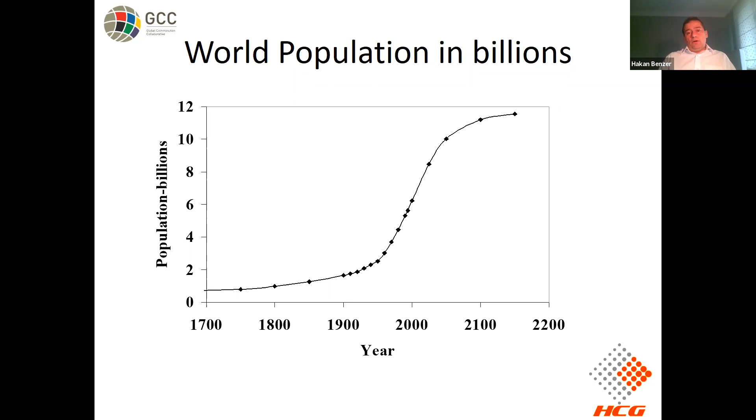If we follow the energy consumption of the world, according to the International Energy Outlook reference, we can see that especially in certain regions, the energy consumption doubled or tripled. So we can say that the total energy consumption is continuously increasing, and basically the major role goes to the comminution side. As we all know, 5% of total electrical energy consumption is used in comminution worldwide, statistically, and the cement industry takes the majority of this consumption.

It's roughly speaking 2%. In a typical cement plant, 60 to 70% of electrical energy used goes to comminution. For those who are not familiar with the cement industry, let me explain where the comminution takes place. There are 3 steps where we implement comminution. One is, of course, fuel grinding. The other one is raw meal grinding. And the third one is the final cement grinding.

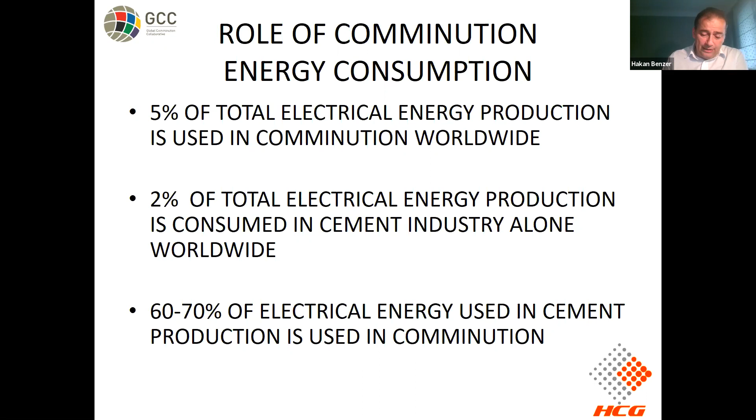In addition to all of these, in order to increase the surfaces, we may grind some pozzolan materials, such as blast furnace slag or some natural pozzolans, to finer values. So comminution is very important, and cost-wise, it's very critical in the cement industry. And with the competition, especially when cost issues are getting important, the cement industry changed its mind from conventional technology to innovative technologies.

In parallel to all of these, especially in recent years, we are all aware of the Kyoto Protocol on climate change, and the countries who signed up accepted to come back down to the 1990 levels of carbon dioxide emissions of 20 or 30 years ago.

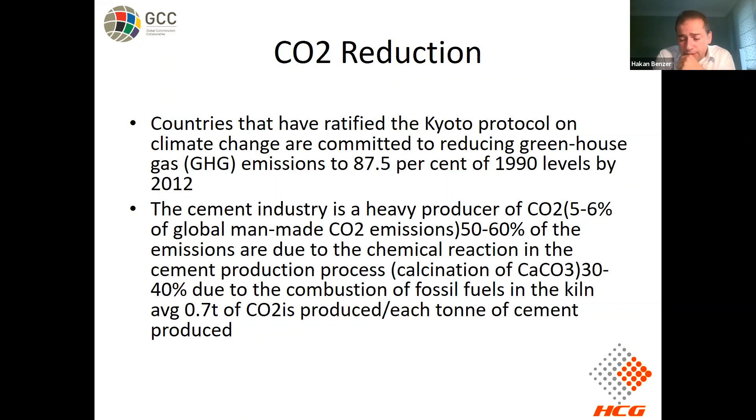When we look at the cement industry, it's a heavy producer of carbon dioxide, and roughly speaking, 5 to 6% of global man-made carbon dioxide emissions come from the cement industry, basically depending on the chemical reaction there. So in order to produce 1 ton of cement, they produce 0.7 tons of carbon dioxide in their factories.

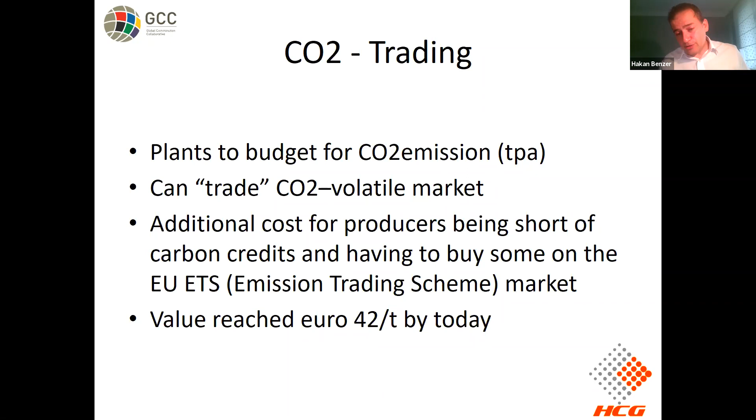Therefore, carbon dioxide trading is very important for them, because nowadays, roughly speaking, a cement plant's profit is in the range of $10 to $12. So plants have started to budget carbon dioxide emissions because there is a trade and a volatile market. And if you want to buy carbon dioxide on that market, today it reached up to 42 euros. So it's well over your profit. That's why they have to be very cautious in terms of energy consumption. And this is where they start to think innovatively.

This is a typical conventional dry grinding circuit of cement production. It's a 2-compartment ball mill running with a classifier. You come down to a certain grind size. Nowadays, it's very fine. A typical number for cement produced nowadays is a D50 value around 12 microns. It's very fine production with a very old technology. And a typical energy consumption would be between 30 to 40 kilowatt hours per ton for that fineness.

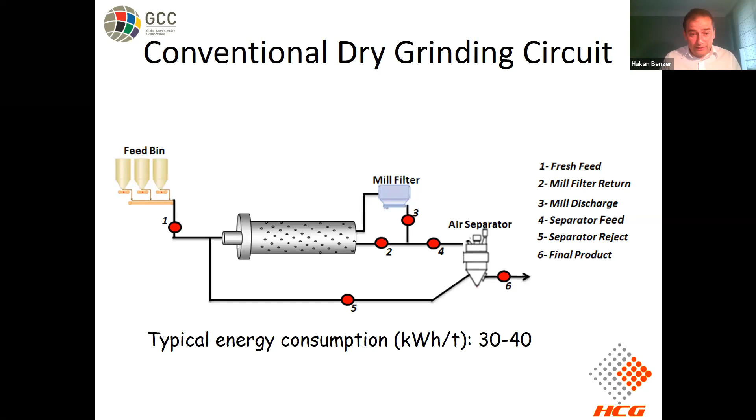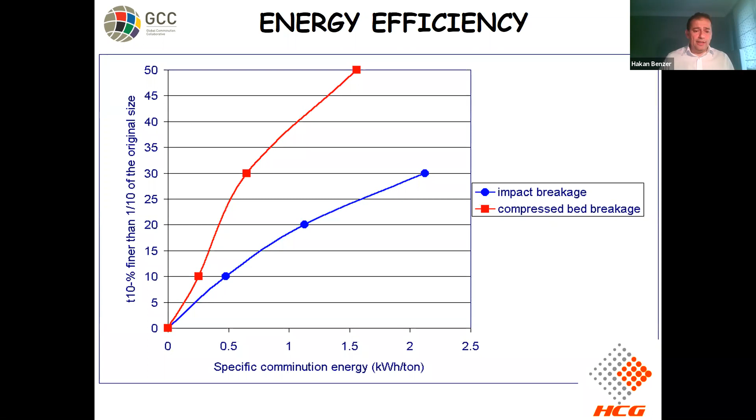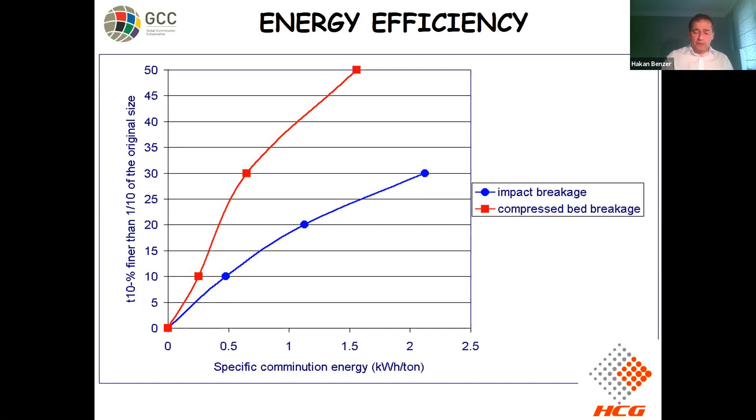After thinking innovatively, of course, we all know that compressed bed breakage has more efficiency compared to impact breakage, and it's proven. If we check the diagram here, at a certain specific comminution energy, we can produce more fines under compressed bed breakage conditions. And this has been patented and worked on with German scientists, and then a commercialized unit started in the cement industry.

Of course, it was not enough. And then a combined version of the high compression system, which is the vertical roller mills. The high compression system is underneath, and on top of it, there's an embedded air classifier working as a unit, producing its final cement right now, but it started with limestone, and for many years it has been used for limestone and the coal industry. Recently it's been in operation for cement grinding as well, with reduced energy consumption to roughly the same level as the HPGRs.

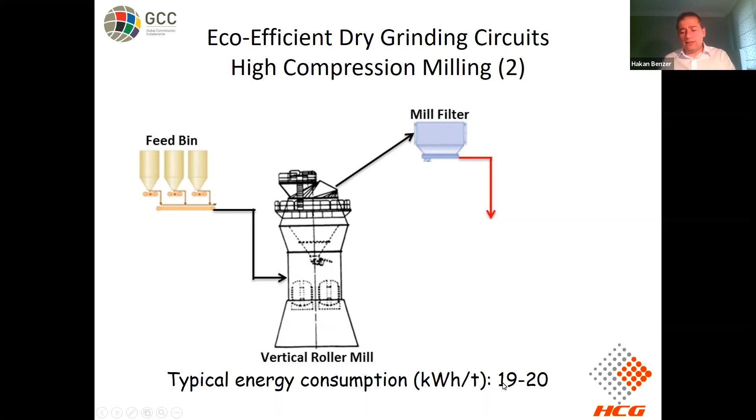Where did we stay in this action as the Hacettepe Comminution Group? When we started the group, we had two hats on our heads, because we come from the mining department, and we have the advantage of closely working with the cement industry, since the number of cement plants in the country is around 80. So in every 50 kilometers we have a laboratory plant we can easily reach and do whatever we needed to do.

So we started a program in 1997 called Modeling and Simulation of Dry Grinding and Classification Circuits, with our mining engineering understanding, because the cement industry's understanding of comminution is totally different. They were thinking about it as a black box. For that reason, we needed to understand the performance of the equipment used in dry grinding. So we started working on the ball mills, the roller presses, HPGRs, vertical roller mills, horomills, and the air classifiers.

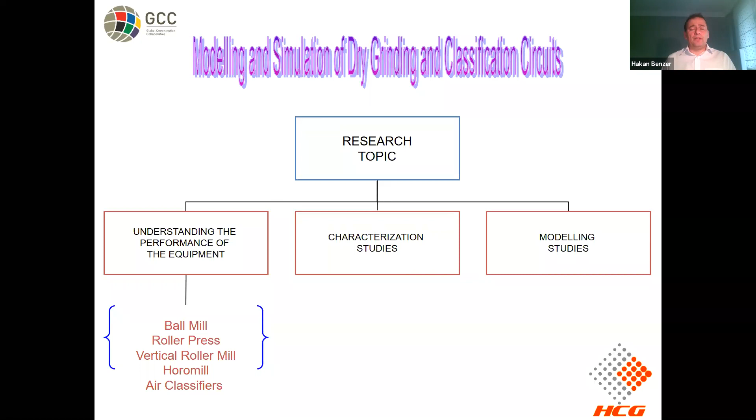These are the innovative technologies, or high compression technologies, being implemented in the cement industry. Since 1985, this has been heavily used in this industry to reduce energy consumption and take advantage of the high compression system. And we started working on this.

In the meantime, we started evaluating the situation of the mining industry. The mining industry has got some challenges ahead, because as we all know, the grades are decreasing and the rock hardnesses are increasing. Again, the carbon footprint is an issue for the mining industry, and the grind size is decreasing, of course, because of liberation requirements. Energy shortage is approaching, and the water issue.

We celebrated Water Day, I think 2 days ago. It's becoming more and more significant because mineral processing requires larger volumes of fresh water, and also mineral tailings is becoming a problem, and dry stacking is taking its place. For instance, in Australia, the mining industry accounts for 2% of the nation's total water use. So it is significant. Typically, industry needs 500 liters for every ton of ground ore. This means we have to start thinking about dry comminution and then dry processing step by step, because after the carbon footprint, water use will be very expensive for the mining industry as well.

If we look at the problem from the energy distribution side, we all know that comminution represents a minimum of 10% of the site production cost, because 54% goes to crushing and grinding. And roughly speaking, it consumes up to 3% of all electrical power generated in the world.

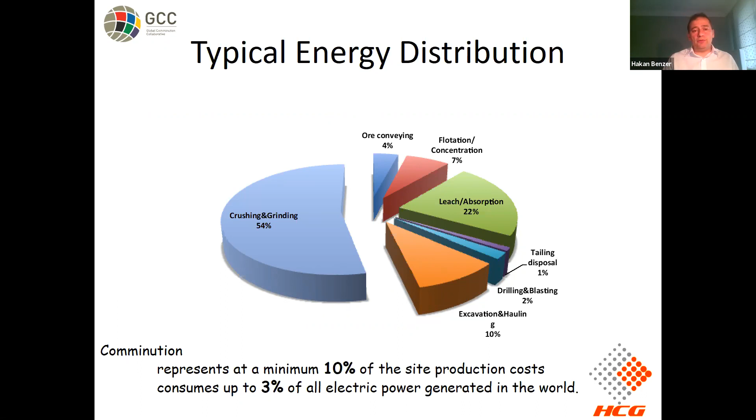We all know that with the high pressure grinding technology, or with the roller presses, the mining industry started their application. If we look at the high pressure grinding rolls, which was introduced in 1985 for the first time, of course it was started with the cement industry, and it was built especially for treating more abrasive materials.

When we look at the schematic view of the equipment, the HPGR consists of two counter-rotating rolls mounted in heavy-duty bearings here, and pressure is applied to one of the rolls while the other roll is fixed in a certain frame. The rolls are driven by separate motors, and the rolls can be operated either at a fixed speed or variable speed, depending on the process.

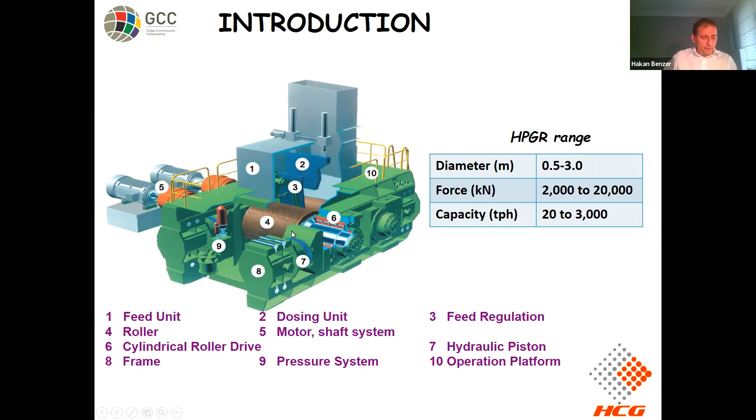Comminution in an HPGR takes place primarily through interparticle breakage, like you see here. Once the material is fed into the system, there is an acceleration point where the material is nipped, and it passes through the compression region. The direct contact of the rolls onto the surfaces transmits energy through the bed of particles in intimate contact with the surrounding particles. The breakage generally occurs, or preferentially occurs, along the grain boundaries, which we call from time to time microcracking.

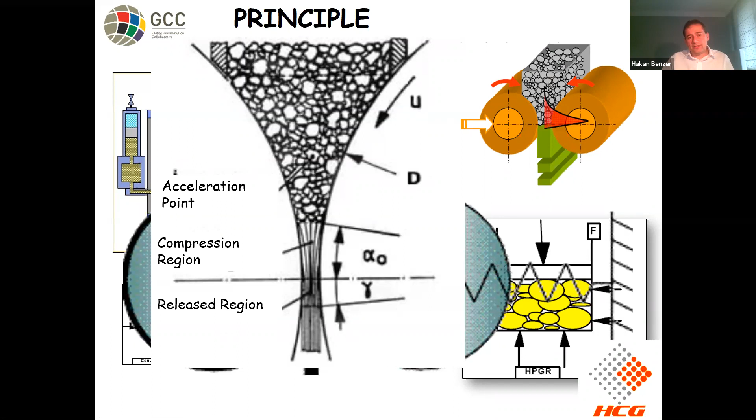And the HPGR product is in the form of a cake if it is operating under a high compression regime, because in most mining applications, unfortunately, we couldn't observe this cake formation because of less power use or less specific grinding force.

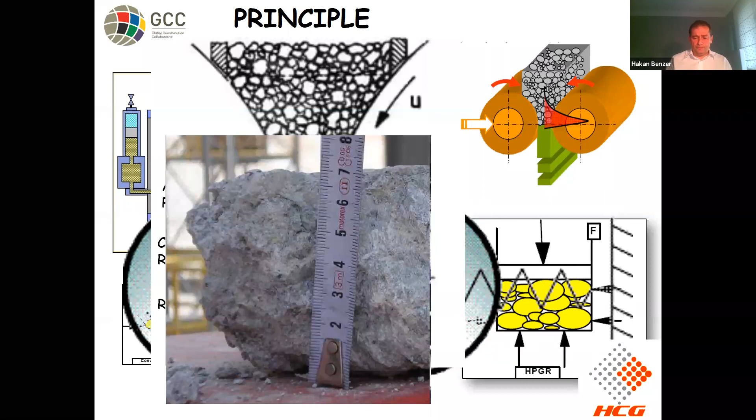What about the benefits apart from the energy utilization of high pressure grinding rolls in the system? The high pressure grinding rolls, vertical roller mills, or compressed bed breakage systems first of all produce more fine material compared to a typical crush size.

All these data have been measured by ourselves. For instance, in the gold industry, we made that comparison and observed a significant increase in the HPGR product. Roughly speaking, if you are effectively using your HPGR in a hard rock application, we can expect 40 to 45% of minus 1 millimeter material in the HPGR product. This is typical.

We also observed or measured microfractures in the HPGR products under the microscope, but also in some cases, especially within the cement industry, we measured this through the work index change of the ball mill feed. It dramatically reduces the ball work index because of the fractures created in the ore body, if of course the high compression can be implemented onto the material.

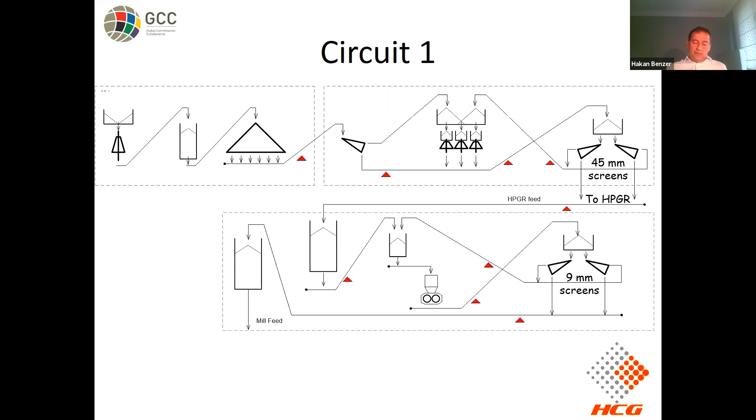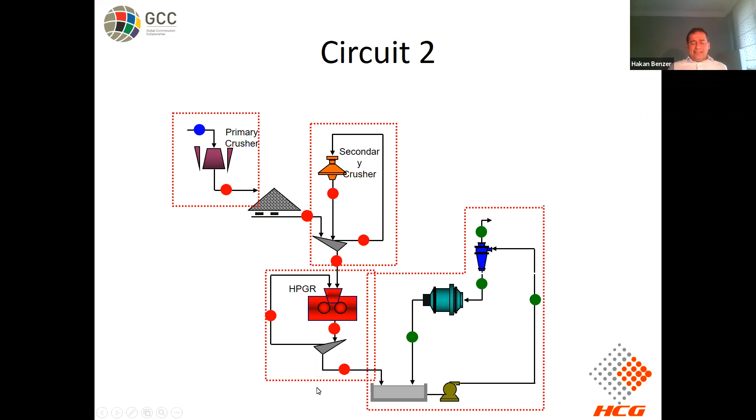So generally speaking, in most of the circuits, we are using the HPGRs as a tertiary crusher stage or very expensive cone crushing application, feeding the ball mill. If you implement a high compression zone, you may reduce the bond work index, which might be utilized as energy efficiency in the downstream ball milling operation, or the fines generated can be evaluated as a production increase. This is the only simple advantage that we could be able to get in the mining industry.

And the third circuit is more on pebble crushing. After the SAG milling operation, if we have pebbles coming out of the system, we can utilize, or we are utilizing, the HPGRs to crush these pebbles.

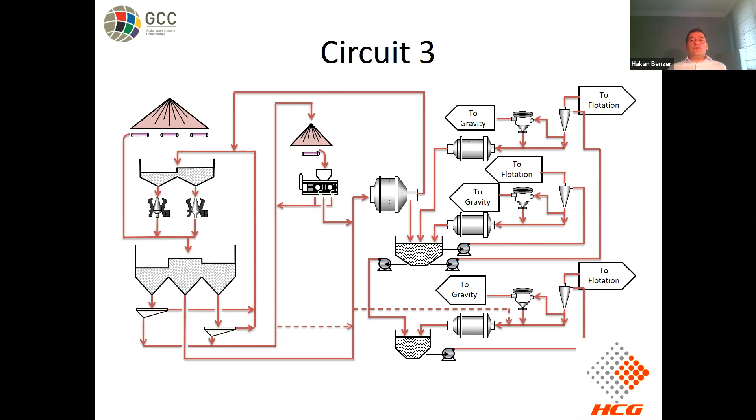So what can we expect from an HPGR if we look at the story from the cement industry back again? You will see 5 different types of application or circuit type in the cement industry. Chronologically, in 1985 when it started, the HPGRs automatically started running in open circuit mode, so it was used specifically for feed preparation to the ball milling operation.

Afterwards, the operators noticed that because of the requirement of adjusting the feed going into the roller press, they split some of their products back onto the HPGR in order to increase the confined bed conditions. So they needed some fine materials. This brought the idea of the hybrid operation, because the HPGR is running with a ball mill, and the ball mill is running with a dry classifier. Some portion of the very fine material can be sent back to the HPGR to increase the compressed bed conditions.

Afterwards, the industry realized that the HPGRs produce significantly fine material, and if an appropriate classifier can be used, then the production rate or the advantage can be maximized. This is the closed circuit application of the HPGR, running again with a ball mill circuit.

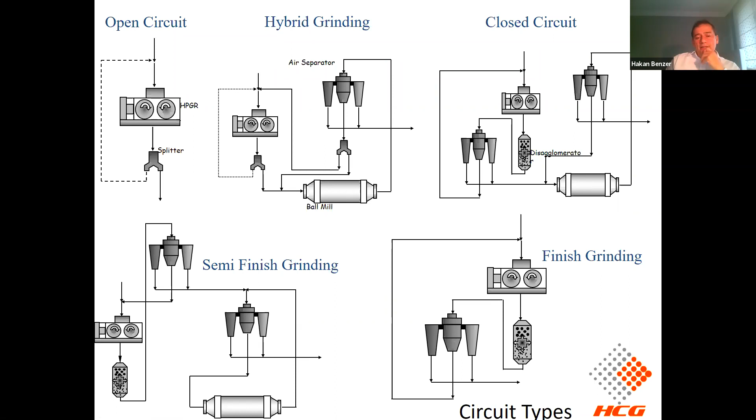Why are circuit types important? Let me explain with some data we collected from a closed circuit application. Here, the feed going into the system is 18.5 millimeter F80 size, and it comes down to 60 microns just in an HPGR circuit. We are talking about a reduction ratio of roughly 300 at 8 kilowatt hours per ton, including the fans, the classifier, and the main motor.

So significant work is being done with the high pressure grinding roll system, and this is typically fine. Of course, in this case, it was not sufficient for the final cement to produce the required strength.

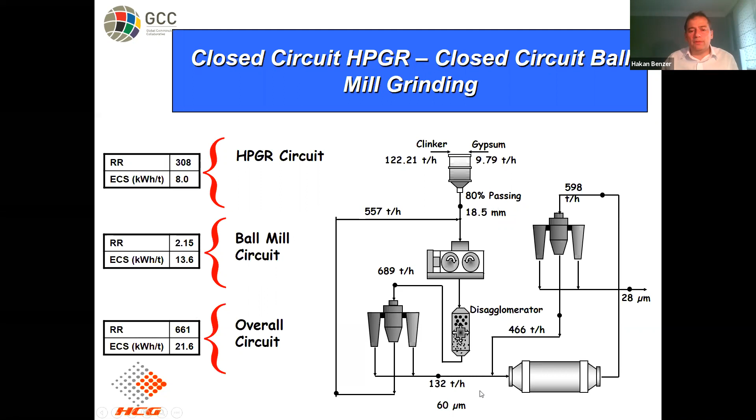Again, at the ball mill, the air classifier is used to grind from 60 microns down to 28 microns. To achieve this reduction, we are spending 13.6 kilowatt hours per ton. So in total, it is 22 kilowatt hours per ton from a starting point of roughly 20 millimeters down to 28 microns. But the majority of the work is being done with the high compression systems here.

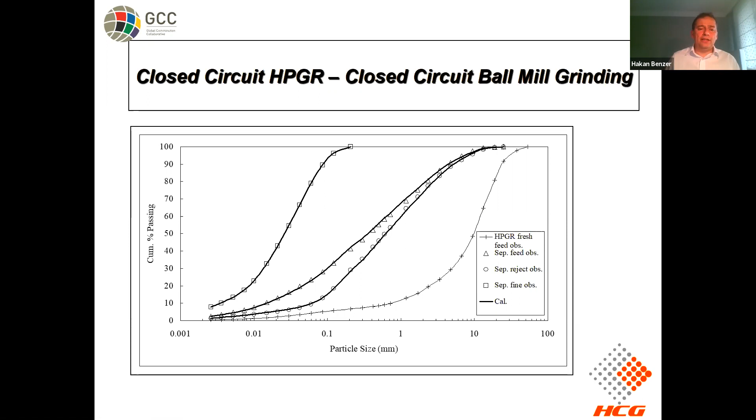You can see the full size distribution around the system. This is the typical HPGR product from a closed circuit. You may notice that we are receiving a steeper size distribution. The reason is the immediate action of fines generation being pulled out by the air classifier from the system, and this gives an energy advantage to the equipment.

What about the air classification? This is a typical performance curve of an air classifier, and you can see it's in the range of 20 to 25% bypass value, which looks like a hydrocyclone operation.

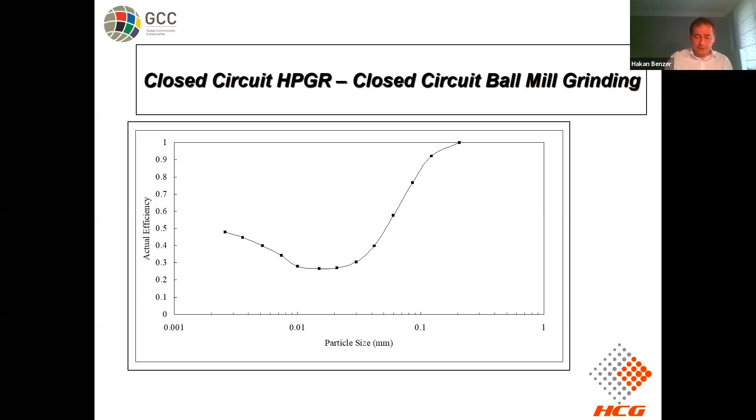Can it be more effective? Yes, it can be. But in terms of energy consumption, if we think of the open circuit HPGR as spending 100% specific energy consumption, this can be reduced to roughly 50-55% just by changing the circuit type. So the HPGR route goes from open circuit to closed circuit.

How will we achieve this? We need classification, dry classification, or in other words, air separators. The first air classifier was patented in 1885 in response to the need to grind large volumes of material.

In technological development, three types of air separators emerged. One is the static version, the other is the dynamic version, and the most recent is the combination of the static and dynamic versions.

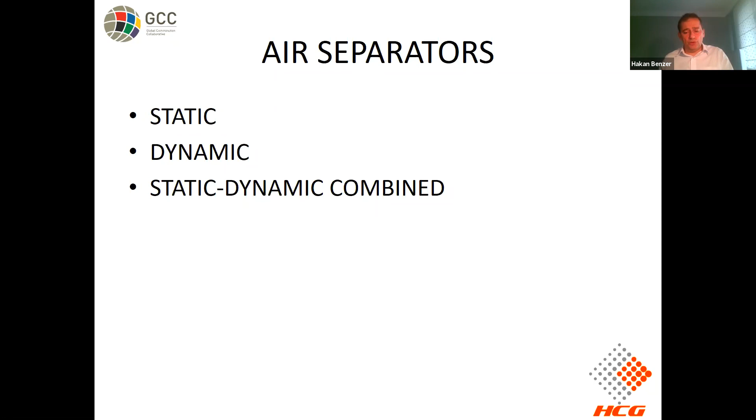The forces acting on air classification can be split into four. As we expect, the gravitational force is very dominant. There's a drag force implemented by air velocity, a centrifugal force created by the dynamic part or the rotor cage, and the impact force which prevents the material from staying in the classification zone.

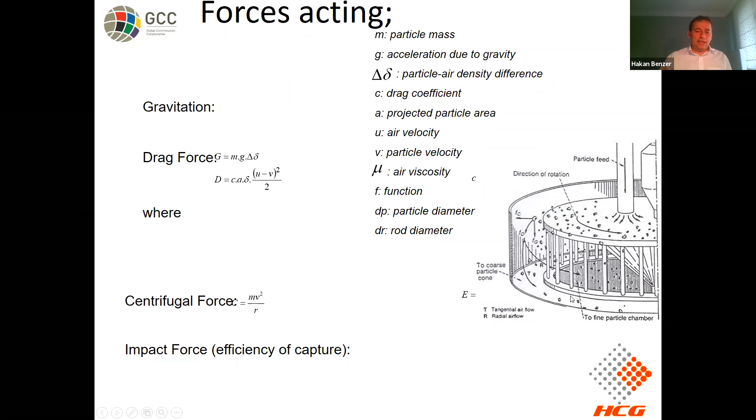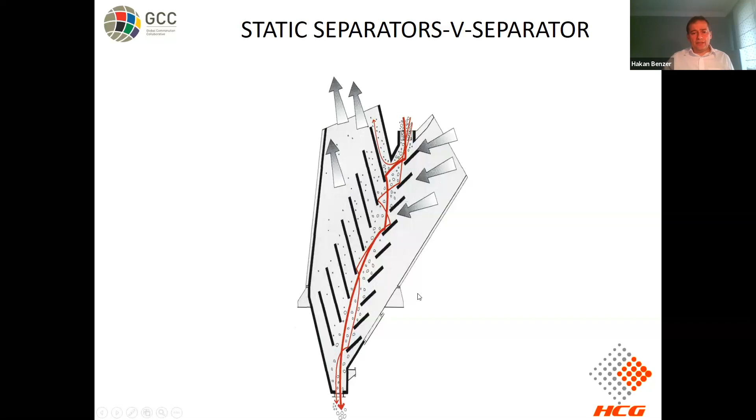In a typical cement application, we can expect to receive a P80 value of 200 microns from the fine section of a V classifier, which is running with an HPGR.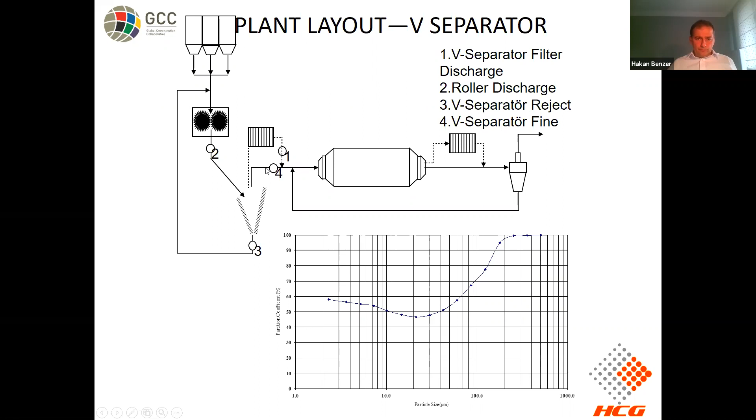The other version is the dynamic classifiers or dynamic separators, where the material is first dispersed on the distribution table and falls down into the gap between the cage and the guide vanes, forming a thin curtain of material here.

After passing through the vanes, the air moves into a horizontal vortex, and the air carries the fine material tangentially across the face of the rotor, which is turning in the same direction as the vortex. So the separation can be controlled by varying the volume of the air flowing through the separator: as you increase the volume, the product becomes coarser.

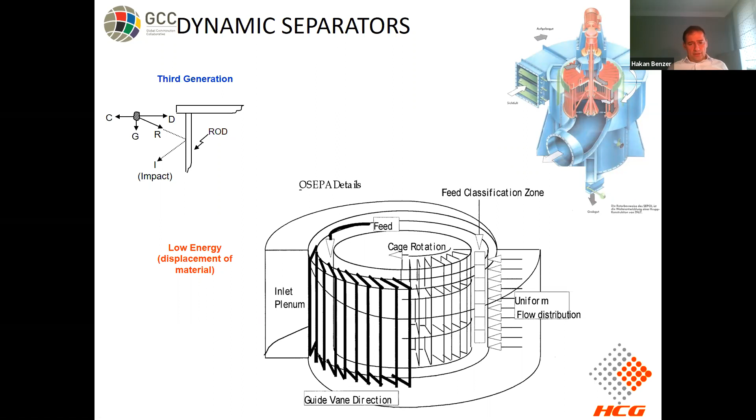By changing the speed of the cage, or by increasing the centrifugal force, the fineness can be increased. Also, the other static controlling point is the guide vanes, which comes from the design. But in the control room, with a simple adjustment of the airflow and the rotation of the cage, you can easily adjust the production or the size.

Chronologically, the development of the dynamic separators started from the first generation to second, and recently the high efficiency separators are in operation in many applications. As you can see here, the air use in the classifier is quite critical, and with the high efficiency separation system, we can reduce the bypass to below 10%, and we can achieve very steep or very efficient separation if the classifier is suitably designed according to your material.

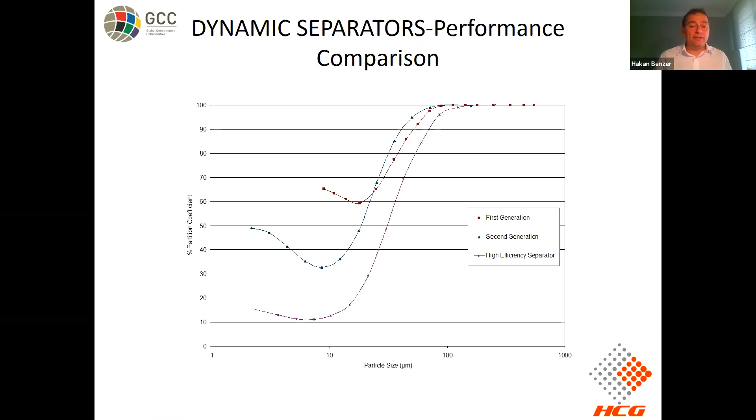The importance of using this V type of classifier is you can implement hot gas or fresh air to dry your material as well. This is a very typical application, especially with high moisture content cement material, especially limestone and clay. The hot gas can be used to dry the material. This can be a solution for high moisture content hard rock applications.

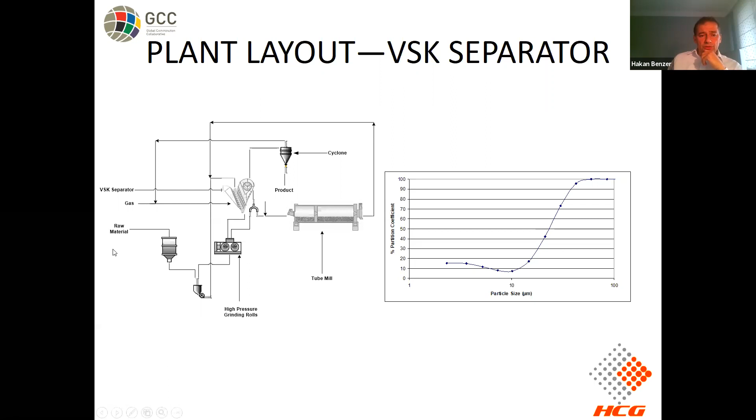What about the vertical roller mills? We talked about the high pressure grinding rolls, which can be utilized to produce final cement with a suitable classifier. Vertical roller milling is the ancient technology of this technique. On the left-hand side, you can see a 1 horsepower mill, which was used for grinding food. And this is the recent version, maybe over 1,000 horsepower, used for grinding either minerals, cement, coal, or limestone.

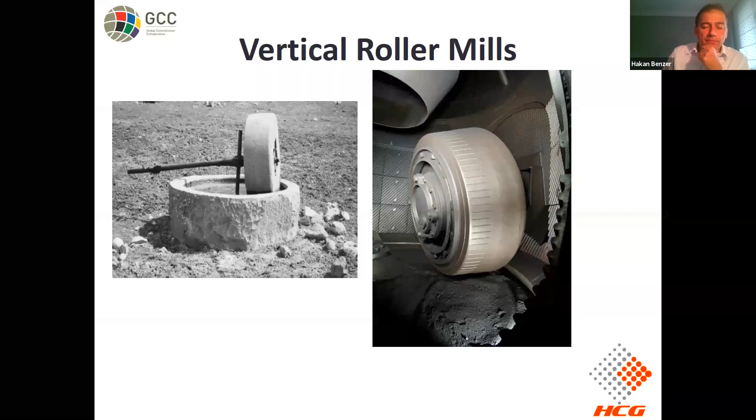So human beings have known this technology since the Middle Ages, going from muscle power to the very strong motor power which we implemented in the vertical roller milling technology.

So if you look at the vertical roller mill working principle, we have a grinding table here, and we have the rolls, which apply pressure, and with the rotational speed of the grinding table, the feed material coming onto that table is directed underneath the high compression zone, and the air flow pneumatically carries the material to the air classifier sitting on top of the system, which is used for fine classification. The fine material comes out from the system as a final product, and the coarse material is sent directly back to the grinding zone here.

It's a unique machine. It's 1 unit. Everything is included: the grinding action and the classification are in 1 unit. It is running as a black box. You can only see the fresh feed coming into the system. You can follow the fine product coming out from the system. The internal action was a question mark.

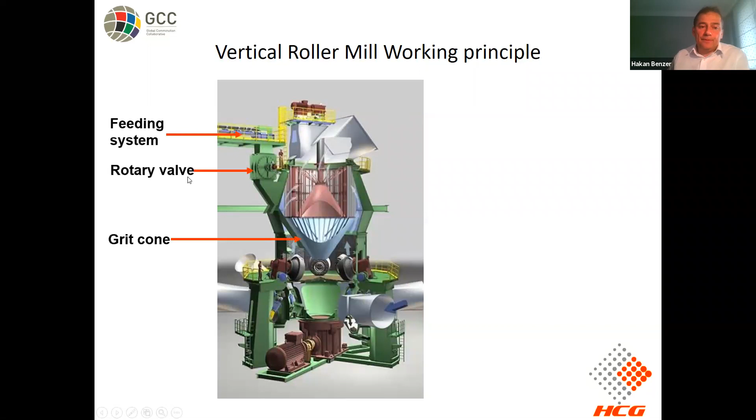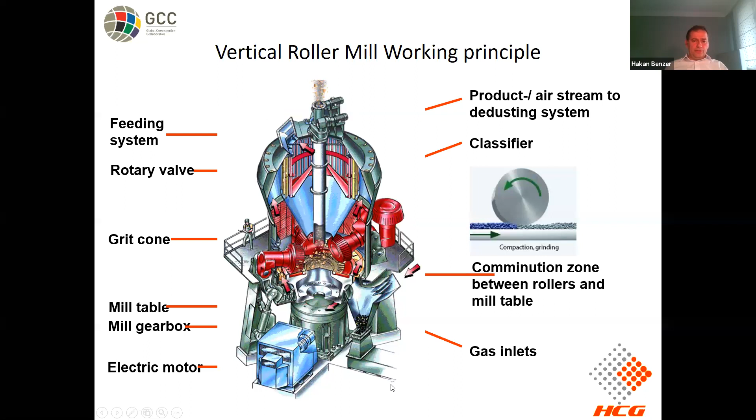You see the feeding system, the rotary valve. This is the comminution zone where the compaction and grinding occur. The mill table, the gearbox and the electric motor are the main parts of the equipment. Of course, the classifier and the gas inlets are used for the separation in the system. You can see the schematic view of the operation. The feed comes into the system, and the fine product comes out from the system. All the grinding action takes place at that point.

What about the benefits of vertical roller mills, energy-wise or maybe metallurgical-wise? There has been lots of work done on this, especially on the cement side. 30% energy saving can be provided by direct VRM grinding. This is proven. That's why the industry, or the new greenfield projects, immediately go for vertical roller mill application in cement grinding as well.

We had a chance to work with the OGP plant of the Loesche company for more than 6 months in Turkey. We had the chance to evaluate different ore bodies, different mineralogies, and we observed that at least 18% less grinding energy consumption can be achieved compared to a conventional wet ball milling circuit.

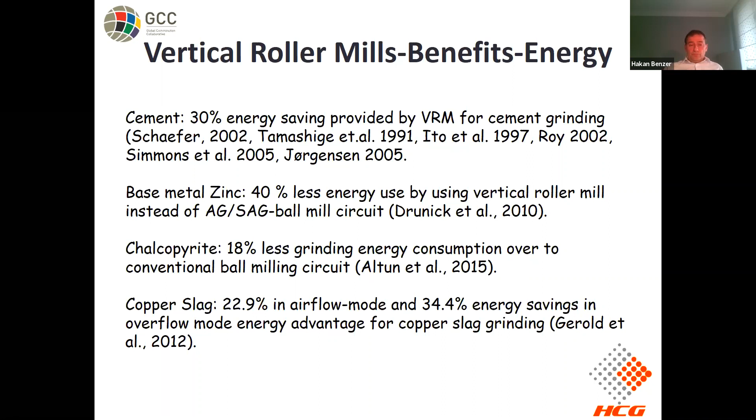Also, some researchers indicated the positive effects on performance of downstream processes like flotation and leaching. In one study, it's been proven that flotation recovery of copper and nickel was increased from 74 to 84%. And also, in zinc, higher recoveries could be obtained at efficient energy use.

Again, this study comes from our gold application. We measured higher gold leaching performance when we implemented a VRM system. The reason is that the microcrack propagation is immediately utilized by the downstream process. In this system, we do not have any other comminution process which kills the microcracks created by the high compression system. So everything is in one unit.

We observed low wear rates. Also, in terms of floor space, less floor space is required. Therefore, vertical roller mills seem to be advantageous for the mining industry in the future as well.

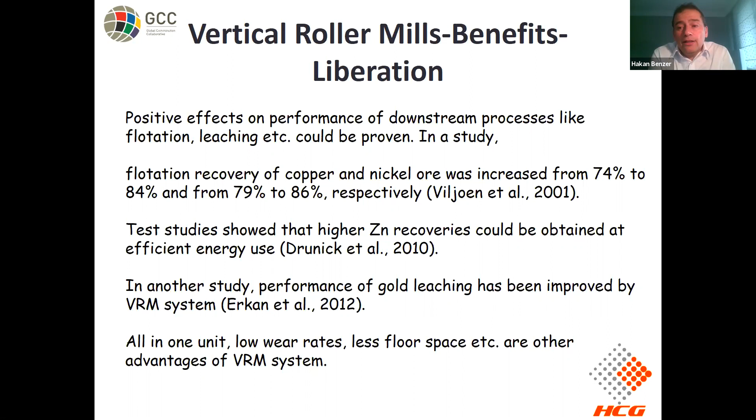In order to understand the performance of the vertical roller mills, we needed to separate the comminution and the classification action. Therefore, as a group, we created a new technique which includes the crash stop of the vertical roller mills during the operation. This is the schematic view of the operation here. We have the grinding table. We have a static classifier.

It's not actually a physical classifier, because pneumatically the material is transported to a certain level, and because of the heavy load, some portion of the material is bypassing back onto the grinding table. We call this a static classification effect because of the air. The residue goes pneumatically onto the dynamic classifier where the classification occurs. We receive a reject from the dynamic classifier and we receive the fine product coming out of the system.

Usually, we have the chance to measure the fresh feed and the final product. In some applications, there's a grit cone here where the coarsest material can be transported mechanically back into the system. So we can only measure these. We do not have any understanding of what's happening internally.

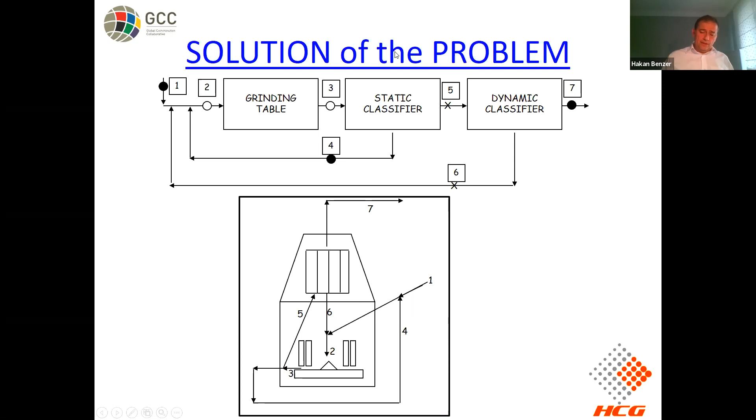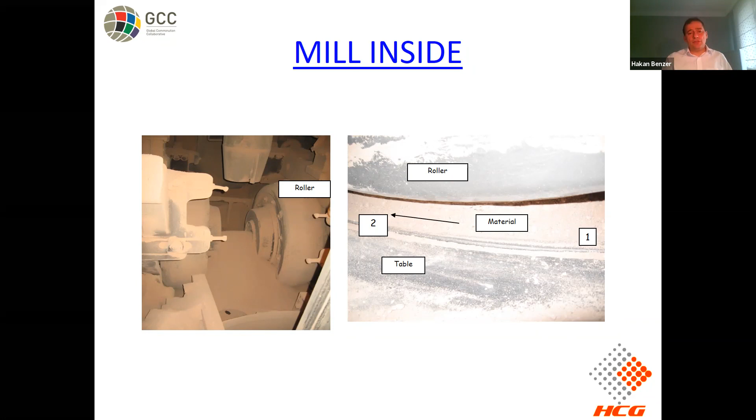That's why, as I said, we started to crash stop the mills, and we are getting samples around the grinding table from different regions, first to address the grinding action and to understand the mass balance within the system. Therefore, we have been using an iterative mass balancing technique to find the best flow rates. This has been tested with CFD studies, and this is the state of the art of the group in order to sample the vertical roller mills.

I'm going to show you one sampling action here. You can see that it's grinding limestone and cement raw material with a motor power of 700 kilowatts. These are the operational data. Roughly speaking, 98 tons per hour of material is coming into the system.

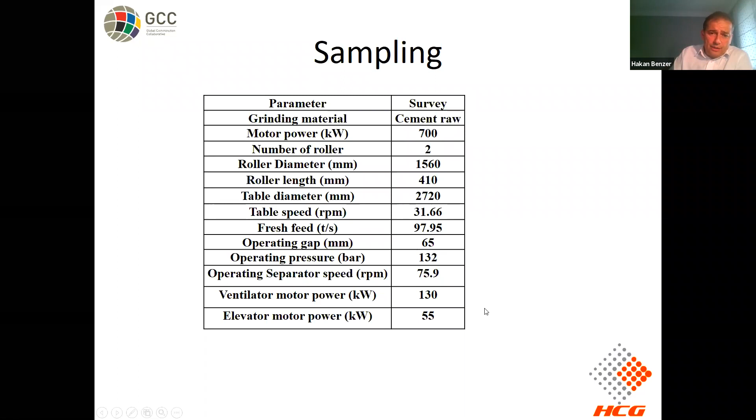And we stopped the mill, we got the samples, we mass balanced the circuit. You can see that this is the product coming out from the system, and the fresh feed coming into the system is here. So you can see that there is a very high circulation within the system because everything is occurring, and the grinding under the rolls is very small. Especially the reduction ratio of the grinding is not big.

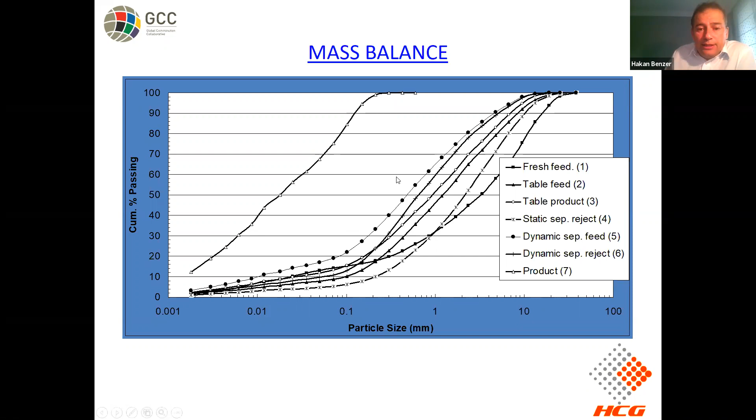So this is the value of this equipment. Very high circulating load ratio can be achieved. These are the tonnage values of that mill. At 98 tons per hour of fresh feed, our table feed increases up to nearly 1,400. So we are talking about a circulating ratio of well over 1,000.

This is the majority of the pneumatic transport bypassing because of the static separator. So 600 tons per hour directly goes back to the grinding chamber, and the residue goes up to the classifier to receive 100 tons per hour product from the system.

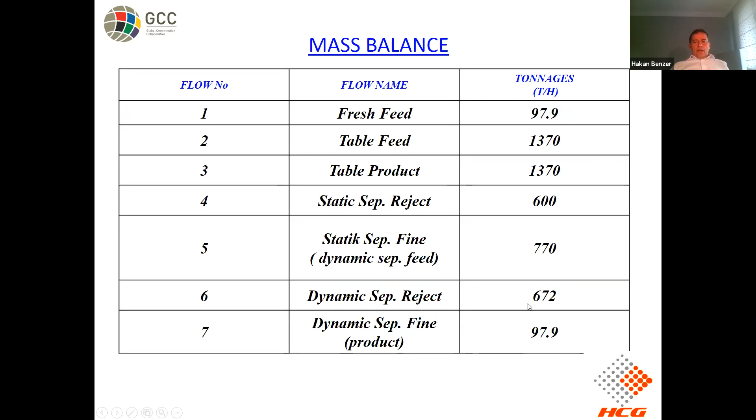So as you see, there are two classifications happening, and as expected, very inefficient static separation because of the pneumatic transportation system, and generally speaking, a high efficient classifier is being used in the vertical roller mills to achieve the final product. But the major problem is inevitably we have no chance to carry the whole material up to the classifier, and this makes a very high circulating load within the system.

You may think that this is very inefficient, but in terms of the design conditions, this has been taken into account, and therefore the producers select a bigger motor size in order to achieve a certain grind size. Because of that high circulating load ratio, because as soon as you reach the fine material, it's been extracted by the air classifier from the system, the product coming out from the vertical roller mill is very steep.

Is this a good thing? It's good for the minerals industry because you produce less slime, but it's not good for the cement industry. The cement industry is addressing the side effects because of the steep size distribution, especially because of the surface area, the strength value is dropped.

And compared to a typical ball mill application, in order to achieve the same strength value with the vertical roller mill, the cement producers have to grind finer. So some of the energy advantage is consumed because of the quality loss of this steep size distribution. But this can be an advantage for the mining industry.

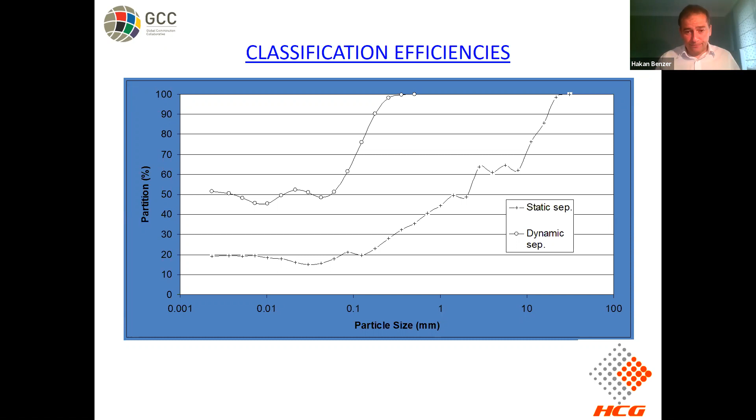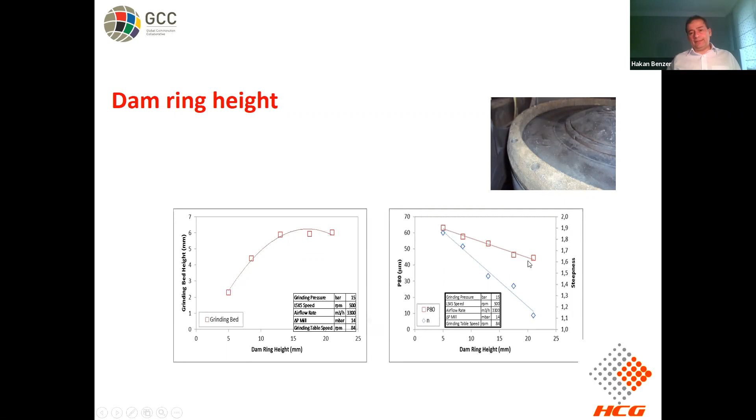Of course, working deeply with these equipment and also working with the pilot equipment, we had the chance of evaluating the operational parameters on the performance. So the dam ring height is quite important, where you adjust your grinding condition in a vertical roller mill. As you increase your dam ring height, at a certain point the grinding bed height is increasing, and then it's stabilized. And if you increase the dam ring height, your product size gets finer, and the steepness of your material is dropping.

Again, the other effective parameter is the pressure. So once you increase the pressure, the production rate increases because you are producing more fines. Inevitably, as soon as you produce fines, the air suction takes the fines out from the system. But if you increase the pressure, the production rate increases, and pretty much in the normal range, specific energy consumption stays constant, while of course the mechanical power is increasing. With the pressure value, the product gets finer and the grinding bed height reduces. These are all important for us to evaluate in our modeling studies.

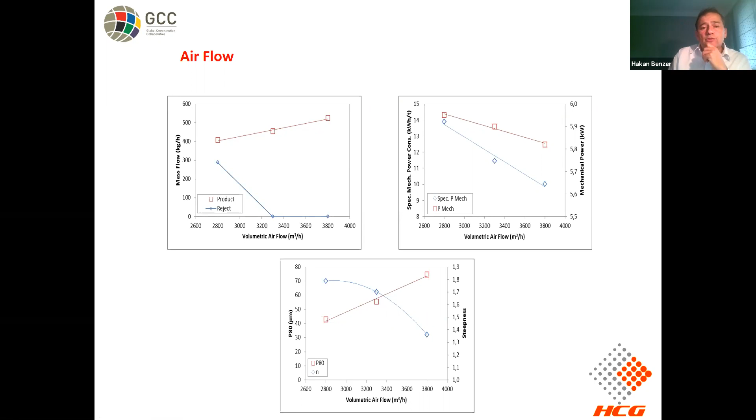At the same time, we focused on the airflow, and if you increase the volumetric airflow to the system, the mass flow from the system is increasing. You are getting more product, and the circulating load is reducing. Of course, the increased volumetric airflow ends up with a coarser product size, and the steepness is affected as well because of the reduced bypass of the dynamic classifier. Of course, we are using a classifier rotor speed, and if you increase the classifier rotor speed, because of the centrifugal force increase, we are getting finer product from the system.

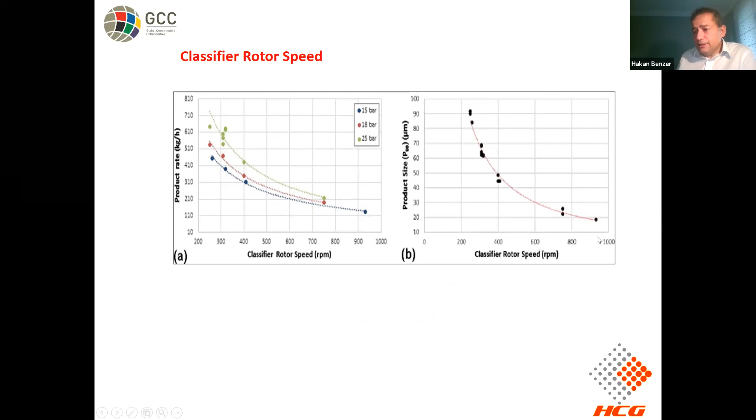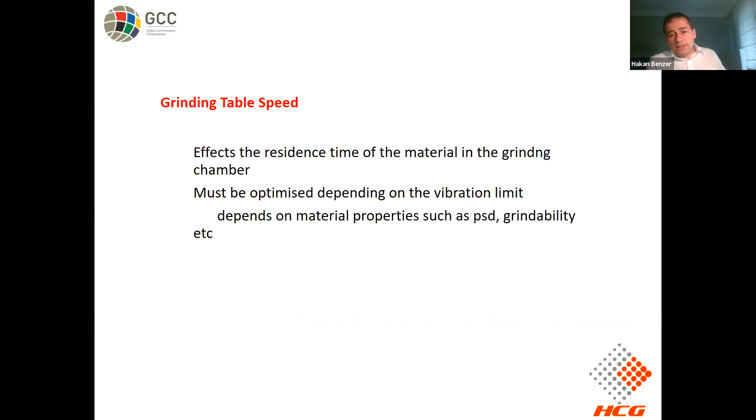And the last effect in vertical roller milling is the grinding table speed, which affects the residence time of the material in the grinding chamber. And this must be optimized during the operation because of the vibration limit. And this vibration basically depends on material properties such as particle size distribution or grindability of the material.

Having all this information, including the high pressure grinding rolls, vertical roller mills, and air classifiers, it brought us to work on the modeling studies of these equipments. For 25 years, we collected all these data. You can see the data being collected from industrial applications; well-defined, comprehensive, characterized materials have been used for modeling purposes. Here, I will concentrate on high pressure grinding rolls, vertical roller mills, and air classifiers.

The rest are under operation, or we have the models for them as well because we have a significant database in hand. But in addition to our industrial data set, especially for mining applications, we needed to use the OGP mobile plant and in-house pilot plant, which we built in our laboratory in Ankara.

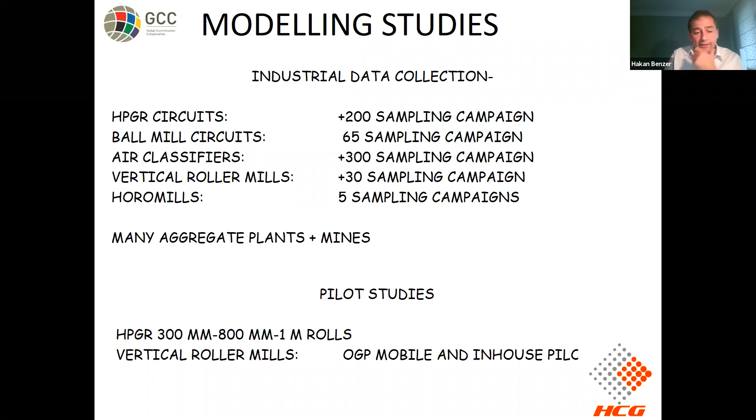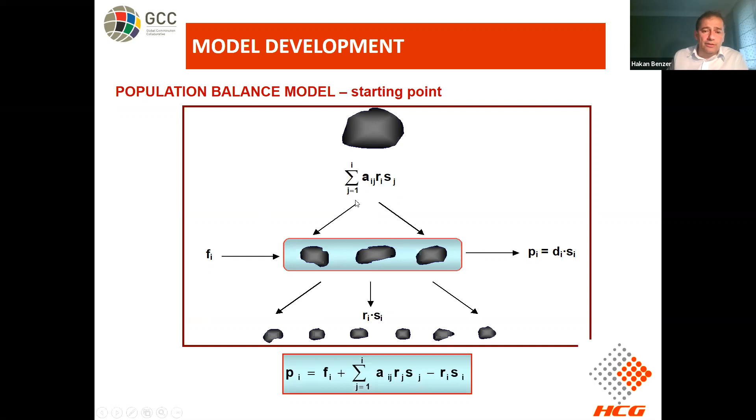For the breakage modeling of compressed bed systems, we choose the population balance model. I won't go into the details of the models, but we have to know the breakage rate and we have to know the breakage characteristics of the material, provided that we know the mill content. So for the mill content,

if it's the HPGR, the material in between the rolls is the mill content, and the material under the rolls in the vertical roller mill is our mill content. Geometrically, by utilizing the dimension of the equipment, we can calculate the mill content.

So how we used all these data sets: we knew the feed and product, and we characterized our material by using the piston and die test. And then we managed to back calculate the breakage rates for different design and operational values or different material characteristics.

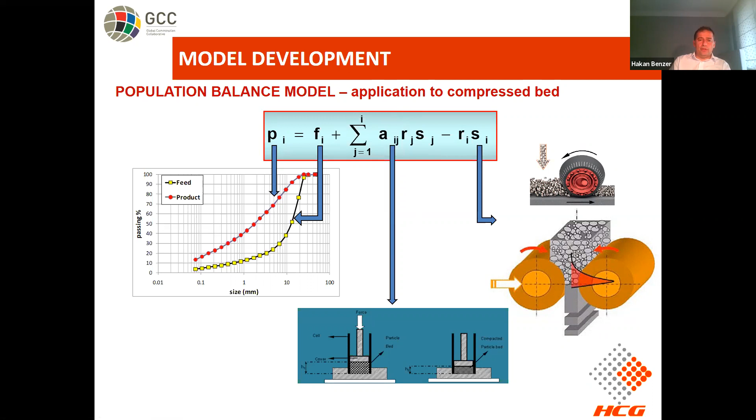Generally speaking, we have the same approach. Rate varies with particle size with constants A and alpha. A depends on specific grinding force, which represents the geometrical condition and also the operational pressure value. And also we have a material softness or material index, which I'm going to define later.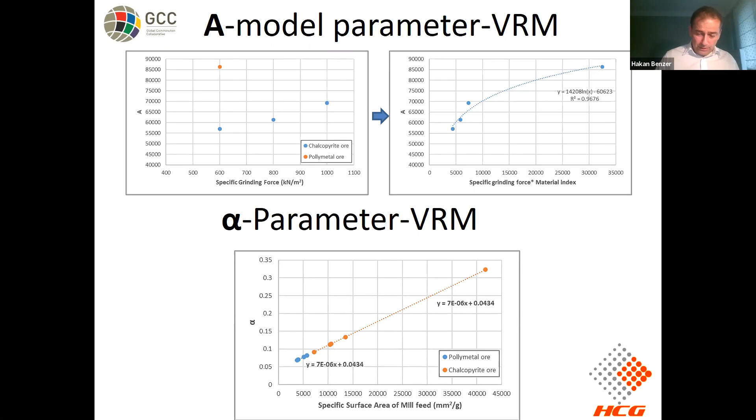After developing this, we are able to make any prediction according to any design value or operational value of a vertical roller mill or HPGR by utilizing this modeling technique. We do not need to do any model fitting anymore. So we can use the models for either brownfield operations or greenfield operations.

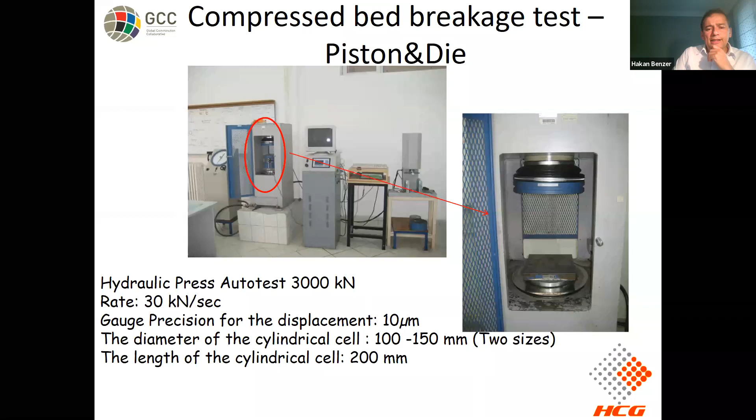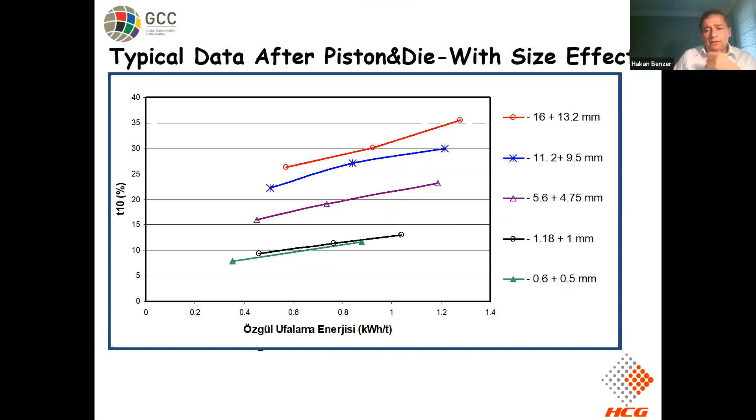I just want to briefly mention the material characterization technique for piston and die testing, which is the group protocol. What we do, we use a typical piston and die, and we have a typical test matrix of 5 different size ranges and different energy levels, and we obtain typical data after piston and die with size effect. You can see the size effect here.

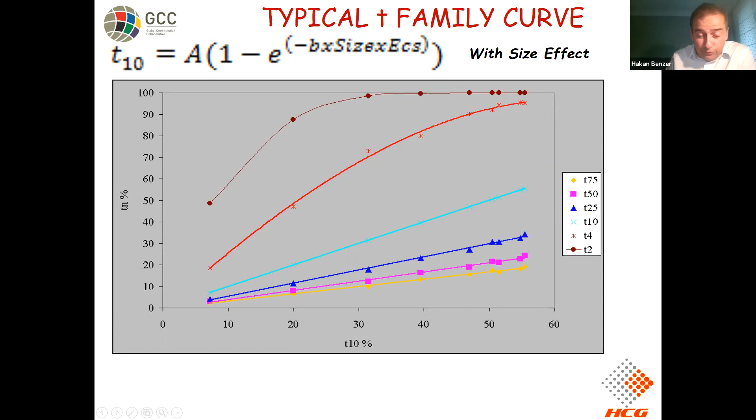So we reflect this effect on the T family T10 curve by implementing the size effect with varying energy levels. We can define by using this T family curve the breakage rate function and breakage distribution function. But the other parameter which I addressed as material softness or material index, where does it come from? Again, it comes from our characterization technique.

This is what we call material resistance to compression, or in other words, during the operation, we measure the disappearing rate of the top size particle under piston and die. So at varying energy levels, we measure the disappearing rate. Then according to the equation, we calculate B multiplied by C, which is the material softness. And this goes well with our model structure.

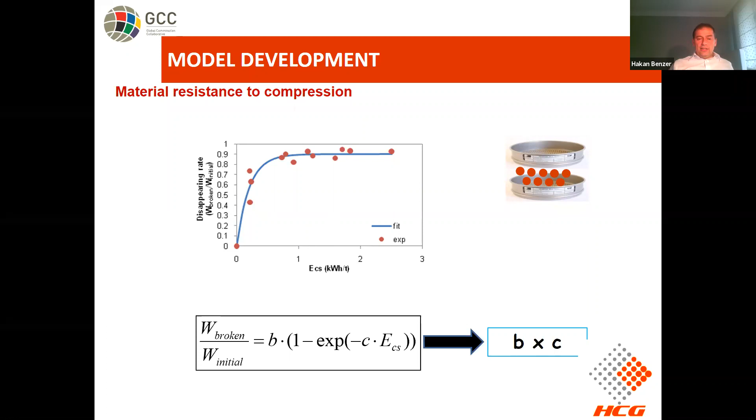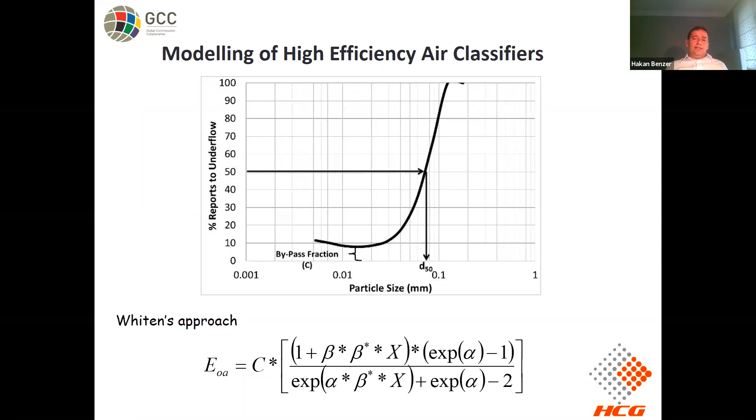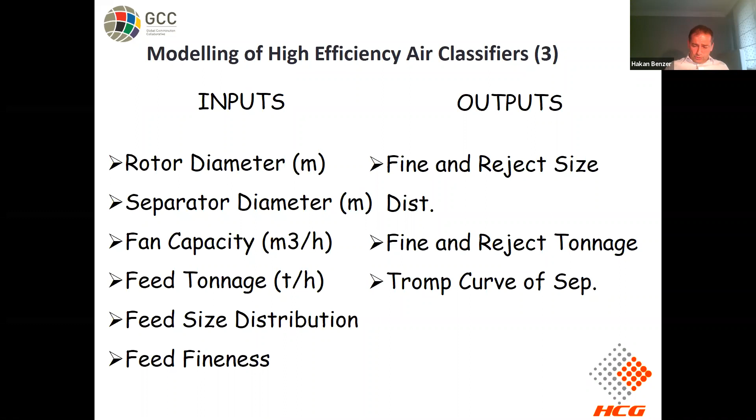Our inputs into our model structure are the rotor diameter, separator diameter, the fan capacity, feed tonnage, feed size distribution, and feed fineness. As an output from our modeling structure, we can find out the fine and reject size distribution, fine and reject tonnage, and of course the Tromp curve of the separator. How do we achieve this?

We found that the dust loading of separator feed is varying with bypass in a linear form. Again, the cut size is affected by airflow and the rotor speed, and also the amount of fines existing in the feed coming into the air classifier. So our air classifier model runs in a dynamic mode. As the feed going into the classifier changes, the classification performance changes.

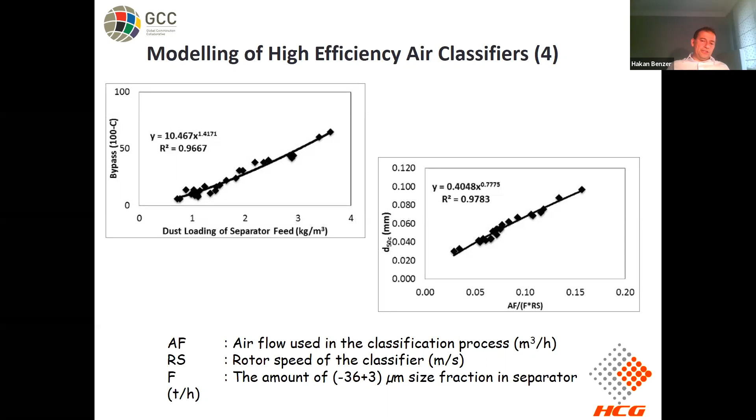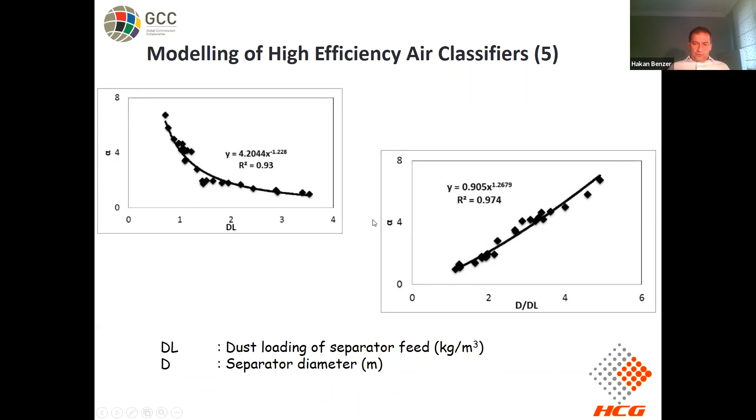Of course, the dust loading of separator feed is affecting the sharpness, and the diameter of the separator is again effective on sharpness. So the ratio of separator diameter to dust load gives a linear relationship for the sharpness of the separation. We set up a link between bypass and fish hook, which is linear, and by getting all these values, we can easily predict the performance of the separator, and we can combine this model with our compressed bed breakage model system, and we can run any closed circuit with HPGRs or with vertical roller mills.

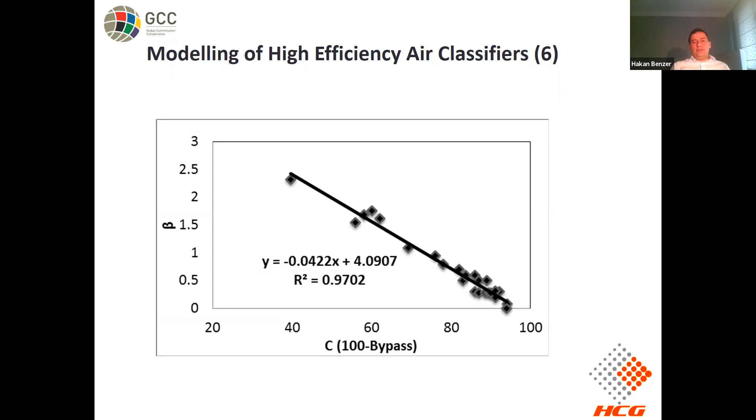To conclude, what I'm trying to explain is that technological changes are occurring from cement to metal, step by step. High pressure grinding rolls was the first step, in open circuit application. Recently, especially in the iron industry, some closed circuit applications have already started, and this is encouraging, but there are challenges. The major challenge is the moisture. How do we handle the moisture? Will we dry it, or will we increase the operability of the material under moist conditions?

I'm addressing some surfactants. Can we use some surfactants in order to handle the wet material in these systems? The other one is the mechanical implementation of higher specific grinding forces, especially in hard rock applications. At the moment, for specific grinding force, we have a certain limit. I'm pretty sure that this mechanical implementation will be achieved with some improvement. Also, some dry pre-concentration technologies are required for selective breakage operation in order to get the advantage of selective breakage in these systems.

In terms of the modeling approach, we approach the problem with a practical view or with a semi-empirical approach. So fundamental modeling of compressed bed systems is required, and many researchers, even in GCC, have been working on this. And especially the vibration problem has to be addressed, which is a function of the material properties: the hardness, the particle size distribution, and the mechanical conditions of the system.

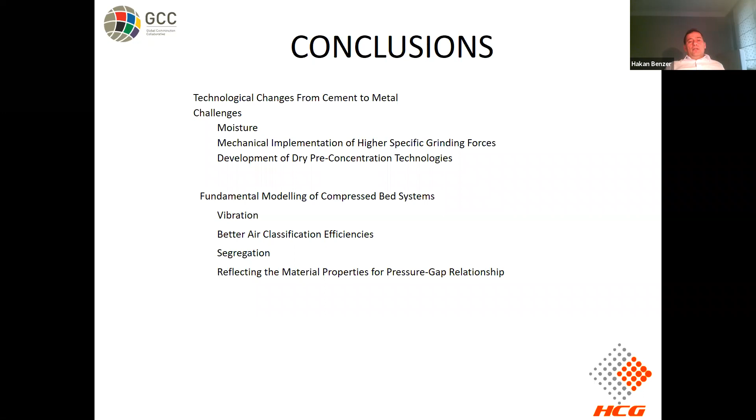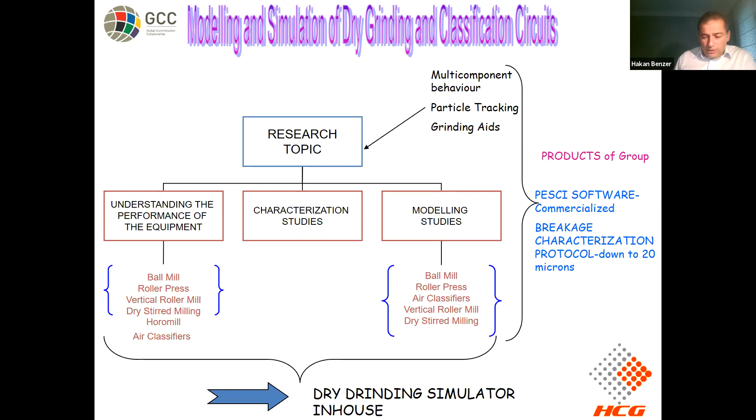What about our group? We started by understanding the performance of the equipment, and at the moment we have completed the modeling studies for ball mills, roller presses, air classifiers, and vertical roller mills. I won't touch dry stirred milling. This is a separate issue, but we have the model structure with multi-component behavior and with some surfactants. We have a dry grinding simulator in-house, which we can utilize for evaluating different flow sheets for the cement and minerals industry. Also, we have a breakage characterization protocol for high pressure systems to understand how breakage occurs in the system.